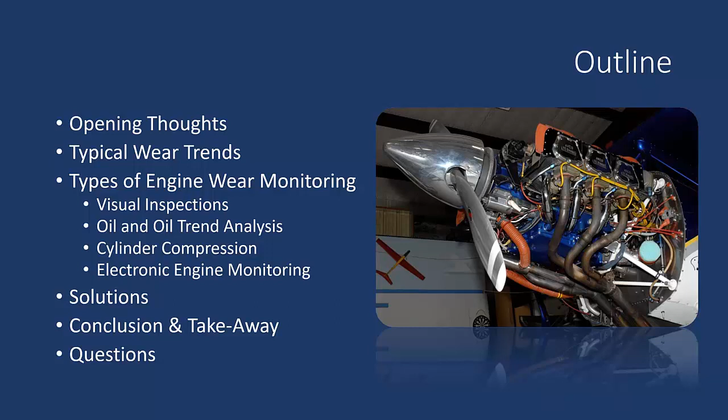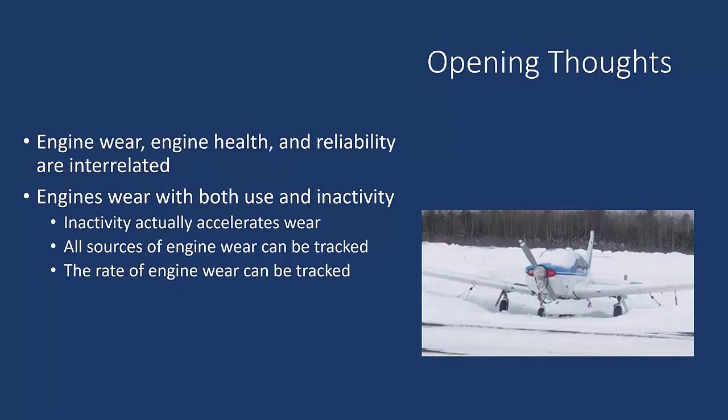Engine wear, engine health, and reliability are all interrelated. Engines do wear with both use and inactivity. Inactivity, or letting the airplane sit, actually accelerates wear. All sources of engine wear can be tracked, and the rate of engine wear can also be tracked using an oil sampling system. Overall engine health is the accumulated knowledge of the available wear indicators.

The average general aviation airplane, unfortunately, is being flown a little bit less than 100 hours per year. Given that there's over 8,700 hours in a regular year, our aircraft really aren't being used very often.

So that causes problems with oil on the engine components. Since they can be corrosive, it causes pitting in steel components and causes corrosion and rust in other areas of the engine.

There's leading engine oils out there for the aircraft that have claims to fame, if you will, that their oil is better because it sticks to the parts. Well, that might be true, but what happens if your oil is contaminated with acids? Another oil is going to flow at 0 degrees Fahrenheit. So how's it going to do at high temperatures, which is where you may be flying most of your summer months? So things to consider.

All right, since we're all running hydrocarbon-based fuels, the combustion process actually produces approximately a gallon of water for every gallon of fuel that's burned through the engine. Now, the vast majority of that water goes right out the tailpipe with the regular exhaust. However, if you have engines with excessive blow-by, and even a normal engine with blow-by, it's a normal process, you will have some level of reactants with the fuel components.

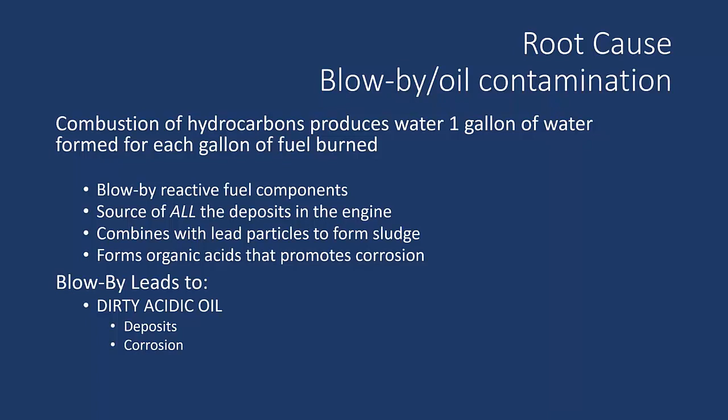All right, so let's go through some typical wear trends. This is going to be a very quick review at this point. Aircraft engines are considered complex components. In order to obtain its useful life, you must do regular periodic inspections and maintenance on the engine.

So when an engine is born, if you will, there's numerous things that can cause failures on the engine. The most common situation is called infant mortality, and that is a combination of potentially a manufacturing defect or human error from the standpoint of improper installation, as an example, or improper engine break-in. That infant mortality period typically runs about 200 hours on your typical general aviation engine.

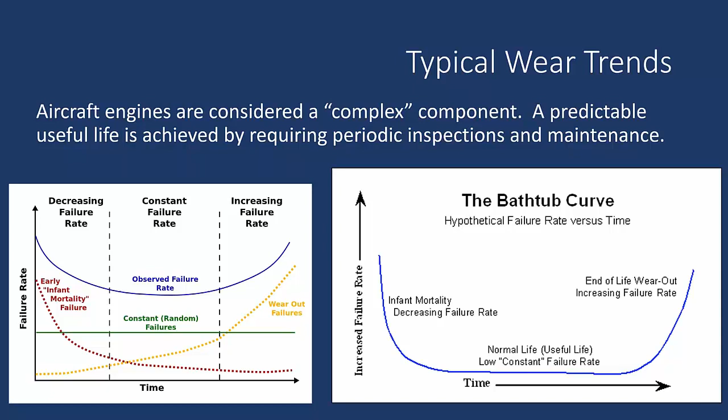All right, so common thought of wear areas in the engine: cylinders. Everyone is expecting some amount of wear within the cylinders. Normal, most cylinders are actually properly treated, have very long service lives, well in excess of half the overall bottom end of the engine life. A lot of your 4-cylinder, 6-cylinder Lycomings, the cylinders will go the entire life of the lower end also. Put that in perspective. All right, piston rings.

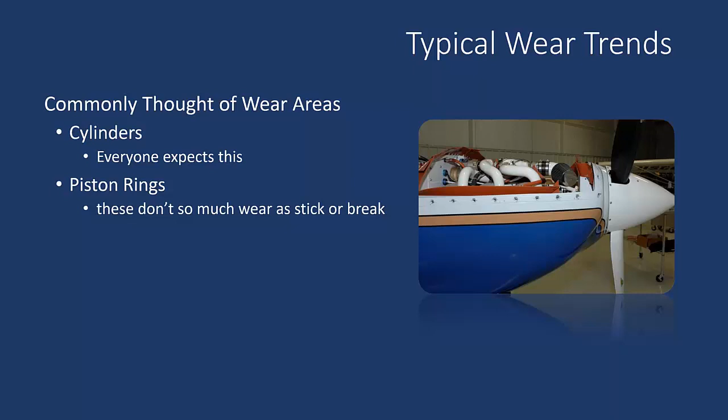The piston rings don't necessarily wear as much as they have a tendency to stick due to deposits, corrosion, and or break. When you have a break in a ring, now you've got to do some little bit of surgery to go get that fixed.

All right, valves and valve guides. Slow and steady wear can be expected on the valves and valve guides. You just need to keep a good eye on the deposits building up on the engine and cylinder, particularly in the exhaust valve area, because deposits form on the guide side. If you run excessively lean or excessively rich mixtures, you can get a deposit on the interface and accelerate your exhaust valve guide wear.

Camshafts and tappets. For most of us, that's the most unpleasant news you're ever going to hear. If you have a camshaft that's corroded beyond limits or worn, the toe of the camshaft gone, you're now into a mandatory engine overhaul situation. You have to split the case. There's no way around it. For some engines, if you have problems with tappets, or if you have roller technology, those can be replaced in service without causing an overhaul.

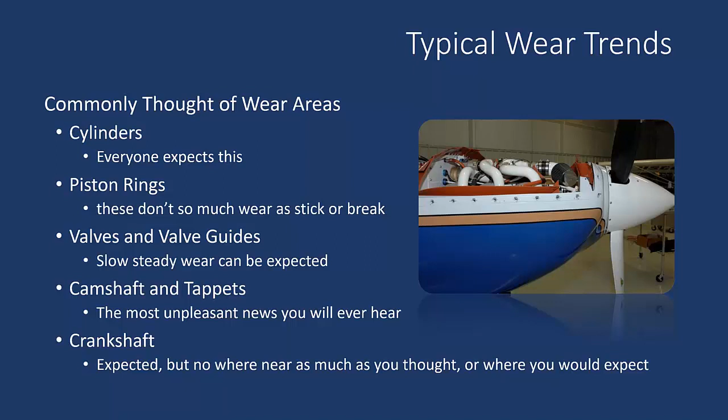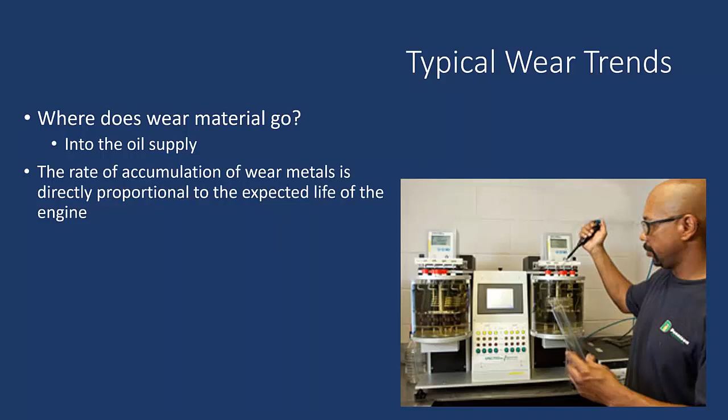So where does all this wear material go? It goes into the oil supply. The rate of accumulation of wear metals is directly proportional to the expected life of the engine. Since these engines and the technology are well known, and the failure modes are well known, we can actually predict when an engine will fail or start to develop major problems based on the amount of wear metals found in the oil.

Many owners and operators do make the necessary commitment in time and finances to conduct oil analysis, but very few actually understand the significance of the data. So it's really important, when doing oil analysis on your engine, to do it consistently, following the instructions provided by the oil sample or analysis company's procedures, so that you get good, consistent data.

An oil analysis program is going to depend on trends. If something just breaks and has big pieces come off of it, oil trends are not going to detect the fault - oil analysis and oil trending will not catch that.

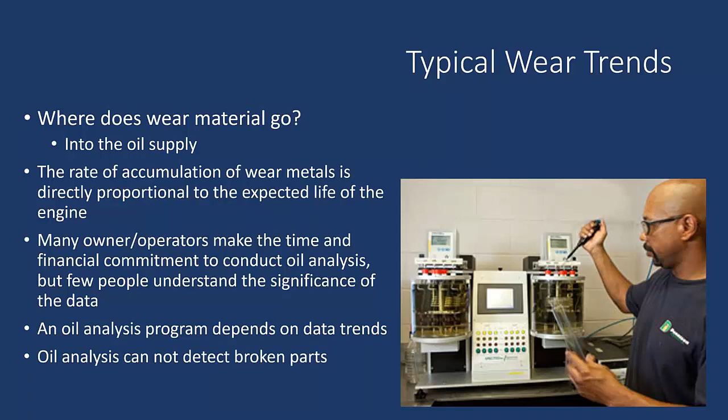The first one is corrosion caused by blow-by. This is a cylinder on the opposite side having blow-by past the rings, and that's carrying a high level of dirty, deposit-ridden material. Unfortunately it blows onto the face of the tappets, and as the camshaft rotates through onto the tappet, it grinds it in and sets up corrosion when the aircraft sits. So you've got to track down and make sure you don't have excessive blow-by going through on a cylinder - that's the side effect.

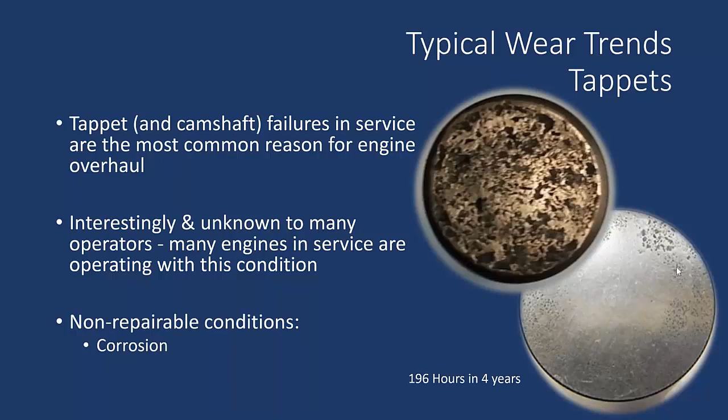Interestingly, and unknown to many operators, many engines in service are operating with this exact condition right now. The non-repairable condition in this situation is the corrosion itself. Engines are corroding out long before they wear out at this point in general aviation.

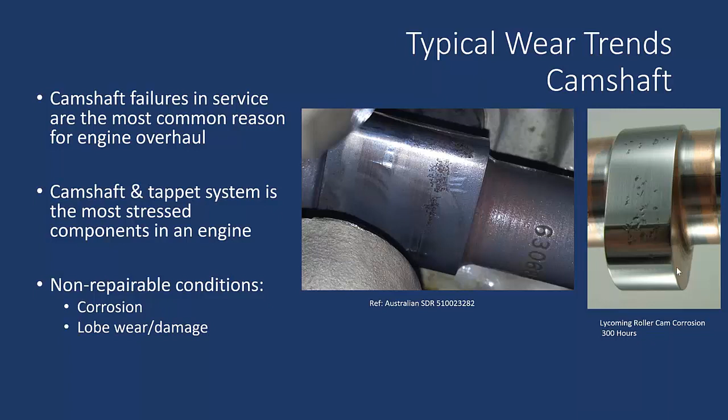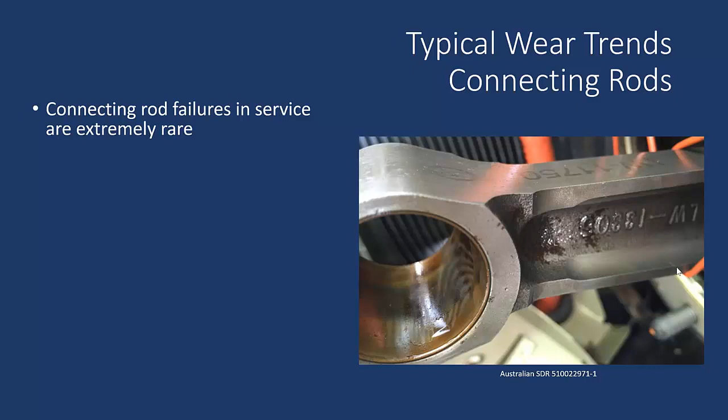All right, connecting rods. Connecting rod failures in service are extremely rare. Rods are simple, robust, and provide a very long service life, and they're very easily refurbished.

Typically non-repairable conditions, very much like what you see in the picture there, is corrosion, very low time installation. You can still see the manufacturer's ink stamps on the components. So in this case, it's corrosion.

What usually also causes a non-repairable condition is shipping damage, improper isolating and letting the two rods bang together in shipping. So that's kind of a problem. Sometimes they will distort due to various operational situations with the engines, and in some cases wear on the big end thrust faces to where they cannot be repaired and maintain the distance that's required between the width of the connecting rod versus the width of the journal.

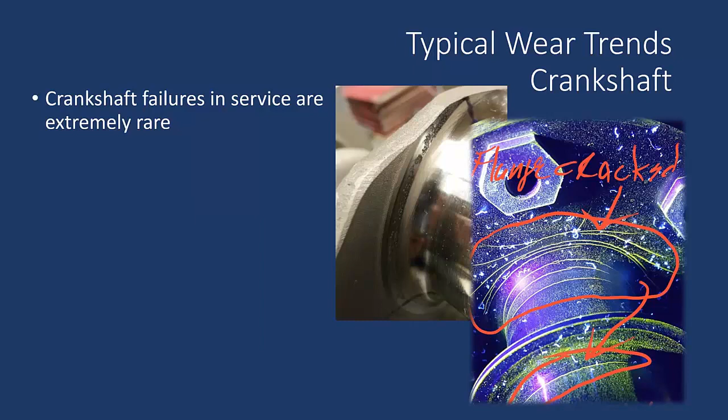Crankshaft failures in service are actually very rare. Aircraft Specialties does routinely refurbish crankshafts through 4 to 5 overhaul intervals, and the typical wear is very low.

The vast majority of crankshafts are not repairable due to corrosion. On the picture on the left, you can see a line of corrosion pits, and this is literally from the engine sitting idle and corrosion being able to get between the connecting rod and the thrust face of the crankshaft. So very unfortunate to lose a $10,000 crankshaft due to corrosive oil, essentially.

On the right-hand side, that's a picture of a crankshaft under Magnaflux, or magnetic particle inspection. And the green lines that you're seeing that are outlined with the red, those are examples of cracks that would be found. The situation that you're seeing here would be typical of a crankshaft that was damaged from a prop strike.

All right. Typically, crankshafts are condemned due to corrosion, pitting, and cracks.

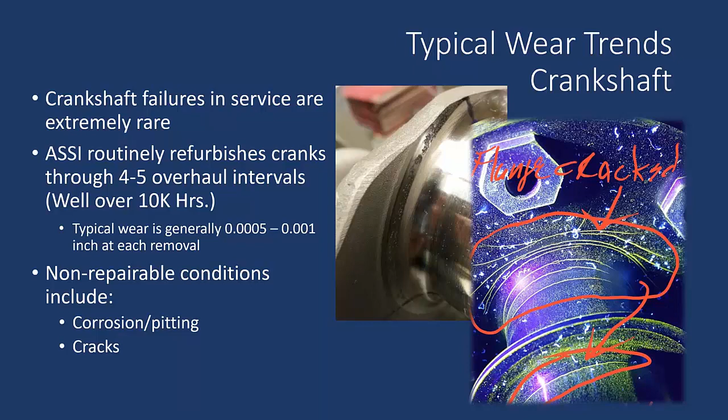The easy fix always is, whenever you can, fly the airplane, fly it with some altitude on it, with a pretty decent power setting for at least an hour, and that will keep a lot of your inactivity, corrosion-based problems within your engine at a very low rate.

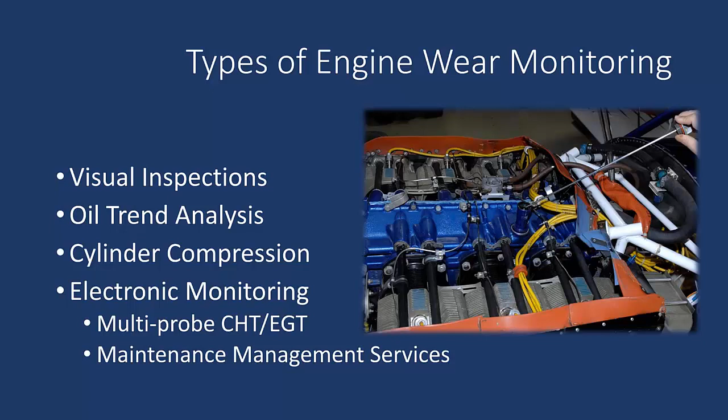Okay, so on the outside of the engine, you want to be doing very well with visual inspections, looking for case condition, cylinder condition, proper baffling and cowling seals. I know that that gets routinely overlooked. If the engine's not properly getting cooling, you're going to have hot spots, and that's a good indicator of where a crack's probably going to start.

In terms of the engine internals, visual inspection, very simple. Start with, when you pull the dipstick and check the oil, look at the color and look and smell the oil and see if it smells burnt. If you pull oil out and it looks nice and clean and new, it's good.

If you pull the dipstick out and there's something that kind of looks like mayonnaise on the dipstick cap, that means probably your oil is not getting up to a high enough temperature to get the water out during operation. That is very typical on aircraft that are operated lean of peak at relatively high altitudes for long periods of time. The engine literally cools off and the oil doesn't stay hot enough to get rid of the moisture and the acids that can then develop into the oil.

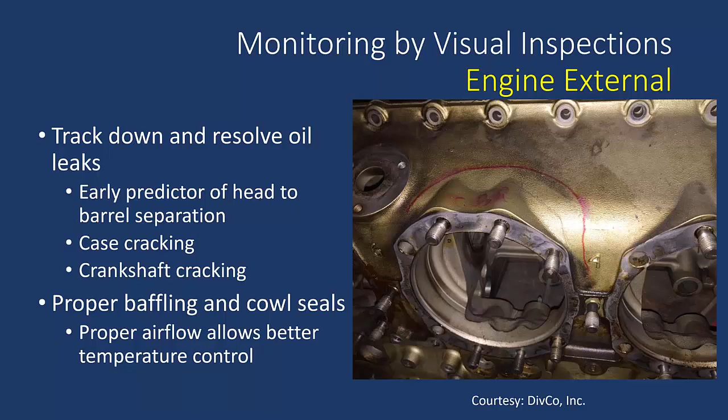Sometimes an oil leak can be an indication of a start of a crankshaft crack if you're dealing with a constant speed propeller installation that uses engine oil. All right, again, proper baffling and cowl seals. Proper airflow is much better for temperature control.

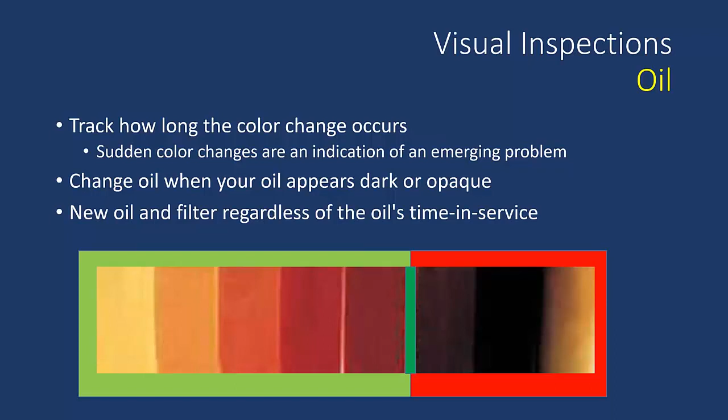Whenever you change the oil, make sure that you put new oil and filter in regardless of the oil's time in service. Big thing with the spin-on oil filters, 50 hours doesn't necessarily mean 50 hours. In a lot of cases, the spin-on oil filters, just in normal operations, will actually start to bypass internally. They're designed to do that. And when the oil gets to a point, it will bypass automatically, and in a lot of cases that's around that same 25-hour mark. So just kind of a note to self.

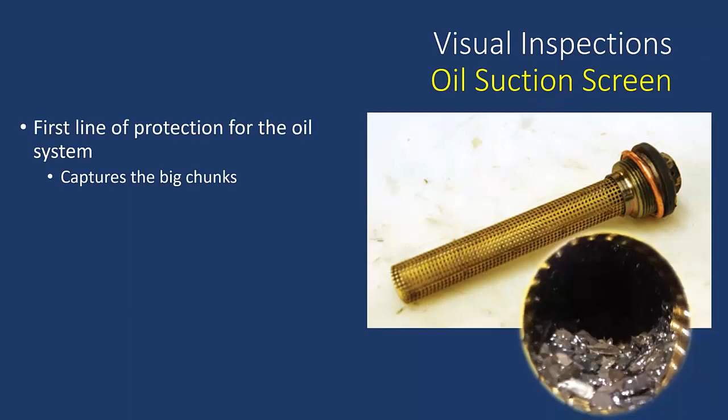All right, oil suction screens. It's your first line of protection with the oil system, and it's going to capture the big pieces. No necessarily trend information there other than that there's something wrong. So make sure that that is inspected whenever you can. It's recommended in oil changes by Lycoming. Continentals have a very similar setup. Unfortunately, with how the airframe installation is, it's typically very hard, if not impossible, to get to in most Continental installations.

Engine oil pressure screen. This is what you're going to have in lieu of a spin-on oil filter. This is going to be your 25-hour oil change interval. What you see there in the picture is a whole bunch of what looks like nice little shiny glitter. That unfortunately is a camshaft that has come apart. So don't be afraid necessarily with a little bit of metal in a suction screen like this or in the oil filter media. The manufacturers have a fairly broad tolerance for the amount of metal that can be found and still continue in service. It's always a very uncomfortable feeling when you see that amount of metal, but it's just something where you find that type of a situation, it's time to investigate.

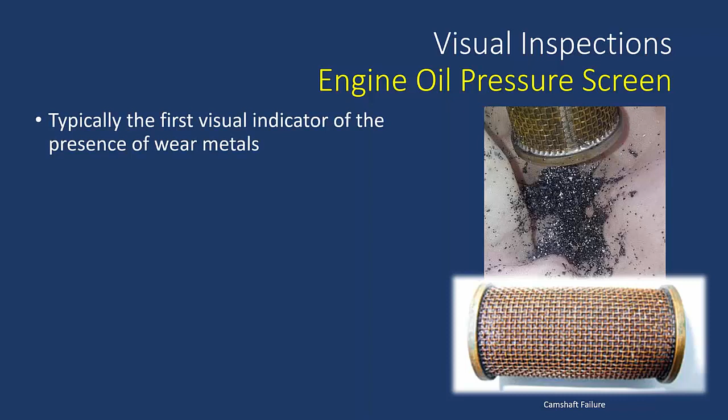And never throw away the data. It's very hard to troubleshoot if this gets contaminated with other debris from the shop or whatever. So make sure you do a clean environment when you're cleaning these screens, and make sure that you save the data.

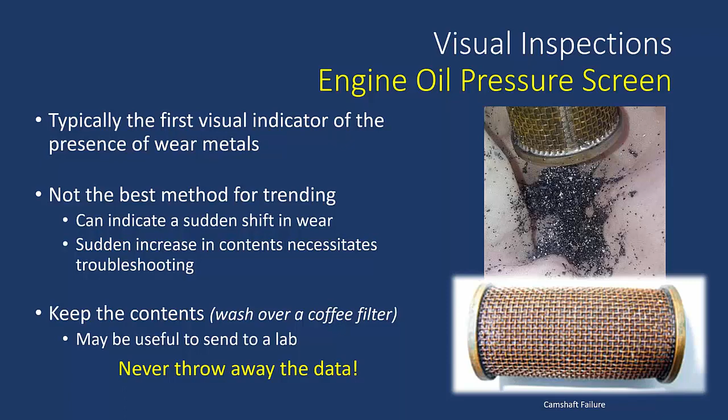All right, visual inspection of the oil filter medium. Very easy way to establish trends. Engine oil is typically changed at a fairly consistent interval on the airplane or the engine, and as long as you're doing consistent oil changes and consistent data gathering with the filter media, it's a very good trend tool. Very low cost, too, since you've already bought the oil filter.

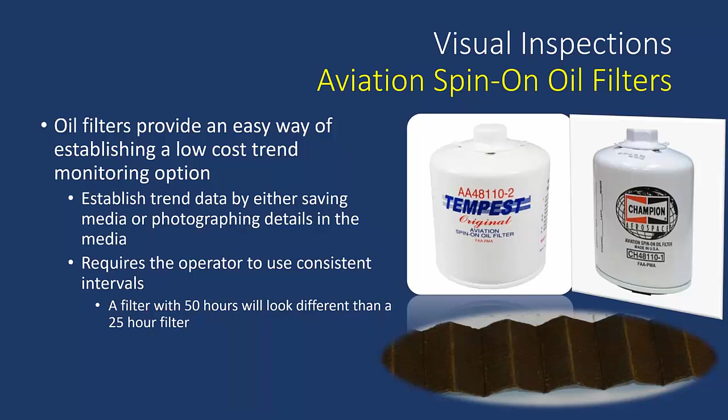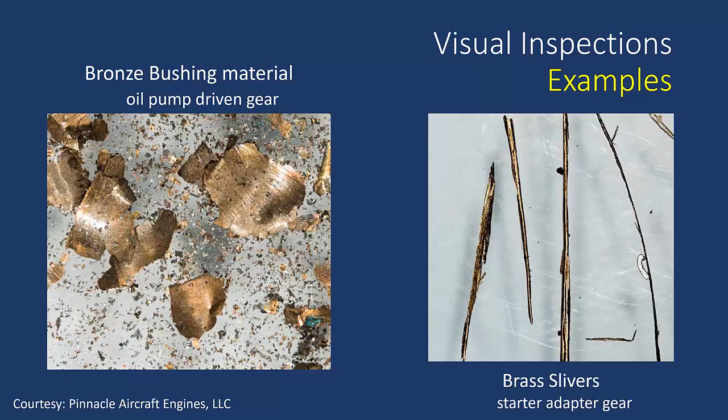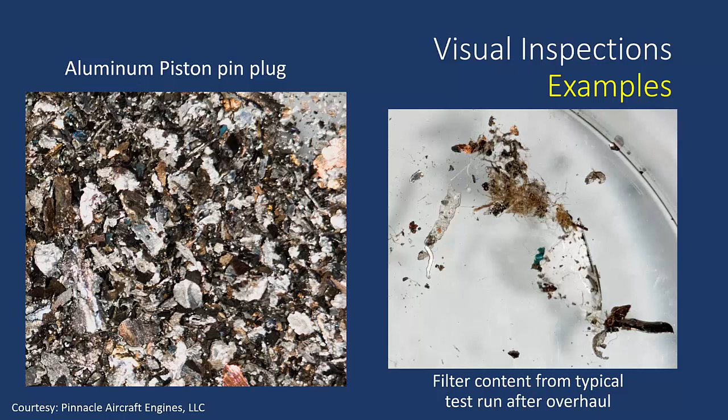On the right-hand side, a whole bunch of what looks to be trash, because it is. This is what it will look like after an engine overhaul. On the first engine run, when you cut the filter open, there will always be some level of debris, FOD, foreign object debris, in the engine. Cleanliness is extremely important when maintaining these engines and having them opened up, but this is a typical example. Some of the stuff there is Scotch-Brite cleaning pad material, some silicone sealant type material, a couple corners from gaskets that flaked off during assembly when it ran. So that's fairly typical.

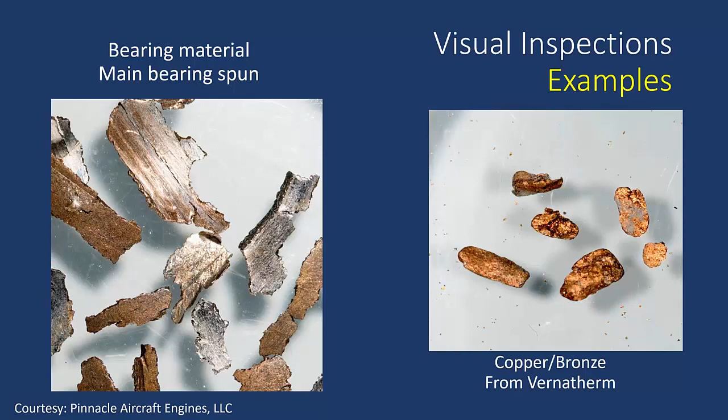Some more pictures there of bearing material.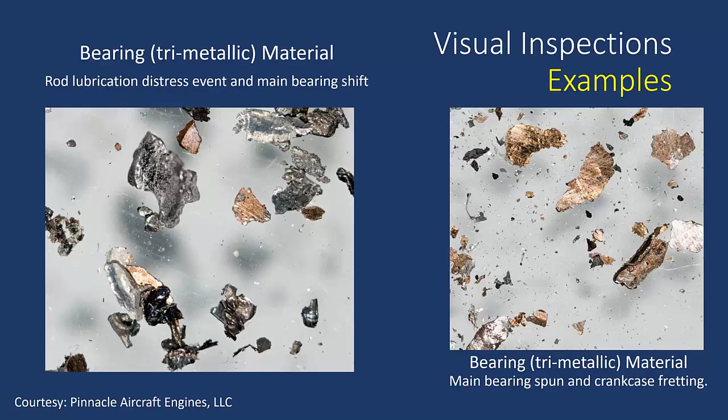All right, let's look at borescopes. So another visual inspection means is going to be borescoping the inside of the engine, or the cylinders in particular. Borescopes are more readily available than they ever have been, so they work out very well.

Easy to operate. If you have one of these or considering getting one, they're well worth it.

A couple of cautionary points with getting a borescope and borescoping your cylinder for the first time: it's going to look scary to you. So get with some folks that have done this before, and the key is to go in and start getting trend data. Obviously you can find a crack early on, but the big picture with borescoping is to understand what the baseline looks like and then take subsequent borescopes and pictures of the items in the cylinders for comparison.

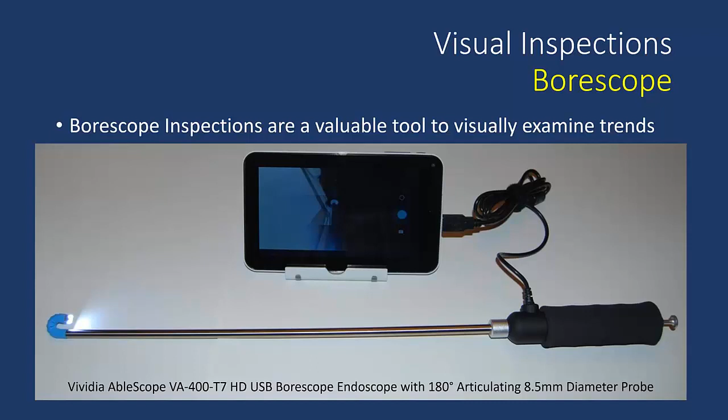See what you're looking at in terms of color changes, erosion, corrosion, etc. All right, so here's some wonderful pictures. Borescopes, just like oil changes, need to be done at regular intervals.

It's really important to get some experience looking at the borescope and looking at the particular engine to know what normal is going to look like for that engine. That's why it's important to look whenever the engine is already open, let's say for a spark plug service. You don't necessarily have to go in specifically for the borescope - just line it up with regular scheduled maintenance where you're already gaining access to that cylinder.

Not a good day. Always compare whatever video or pictures you've taken so that you can see what the level of deterioration is and what its progression rate is.

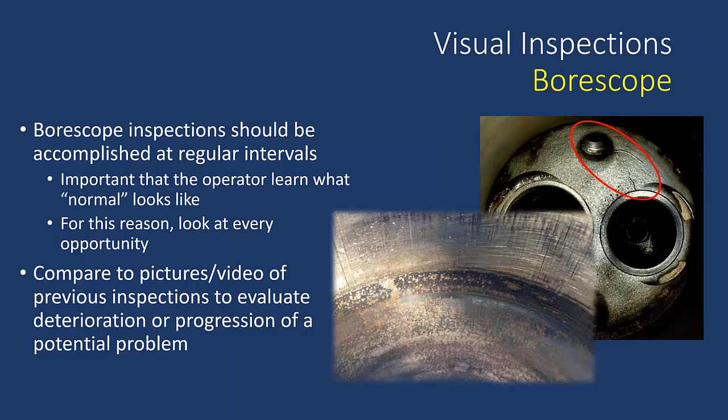Burnt exhaust valves have long been a leading cause of cylinder failures and power loss in piston engines. Valves that fail to seat properly are subject to severe and uneven heating, and based off of color indications, it can be determined that they are in imminent failure mode.

These three exhaust valves here are excellent examples of perfectly good exhaust valves. What you're looking for when you're looking at exhaust valves is going to be the nice symmetrical round pattern, and the red to orange color is perfectly fine.

The saying goes that burnt pizzas are okay. If you see the picture on the far right, that's an example of a properly patterned exhaust valve. The additional deposits on it are due to running the engine richer than it needs to be, or that cylinder running richer than it needs to be. So that's kind of the extreme case. What you're really looking for is pretty much in the middle - that's typically what you're going to see.

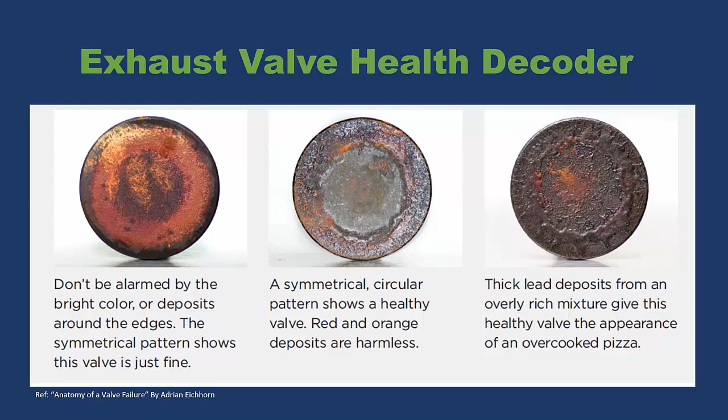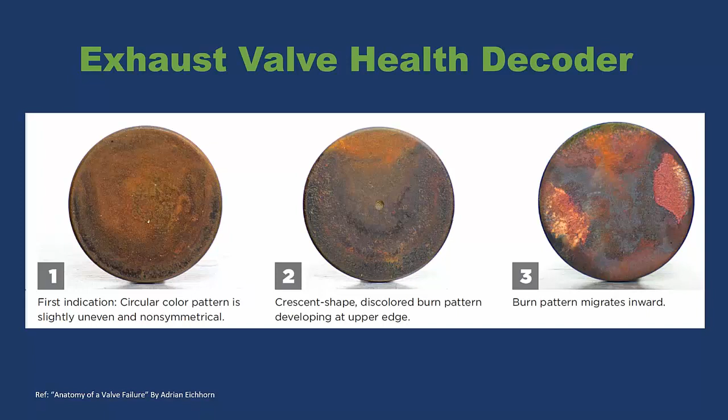It's uneven. And as that goes along, if you look at the 12 o'clock position on the valve, you can see that it's progressively getting more of a burn pattern, and it's not symmetrical. So you've got this little arc going on here. In the third picture, you're seeing that the burn pattern is continuing to migrate inward and starting to get ugly.

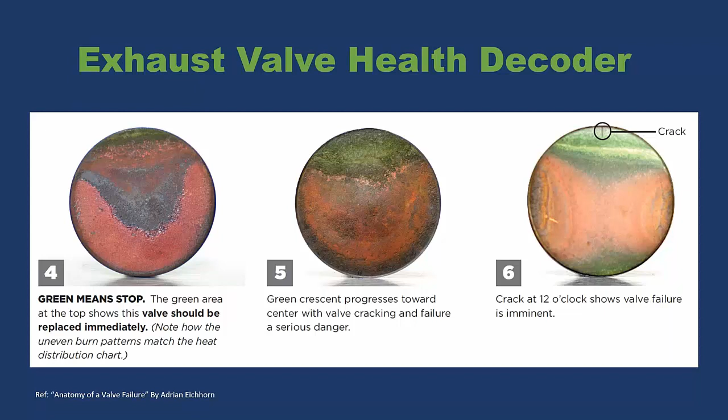There are many trends that can be established with both external and internal indicators. The key with this, just like everything else, is consistency. Make sure that you get consistent data - you're looking at your oil changes consistently, you're looking at borescopes consistently. Oil trend analysis needs to be done consistently with those oil changes so that you get a good overall picture.

Save the data, take pictures, bag and tag the stuff, put it on the shelf, because nobody remembers what it looked like 6 months ago. Trust me. Monitor oil for sudden changes in color or smell - that is a very easy, inexpensive way to get an indicator of cylinder health.

So what we're really finding out in the industry is, with the amount of corrosion and the lack of use of most general aviation aircraft sitting on the ground, we've got to be much more aggressive with arresting the amount of corrosion happening inside these engines.

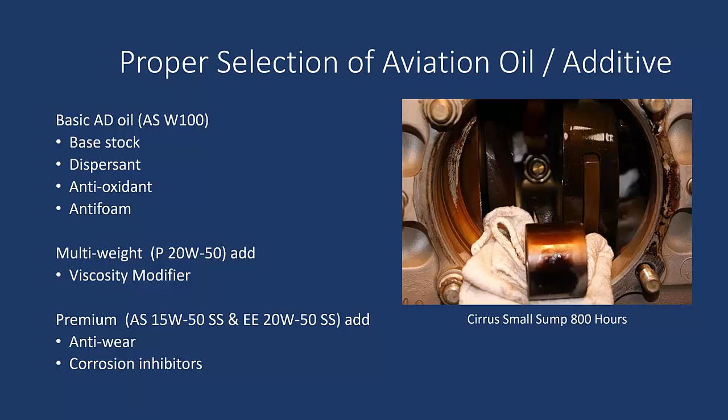So this is not what you really want to see when you have to take an engine down or take a cylinder off.

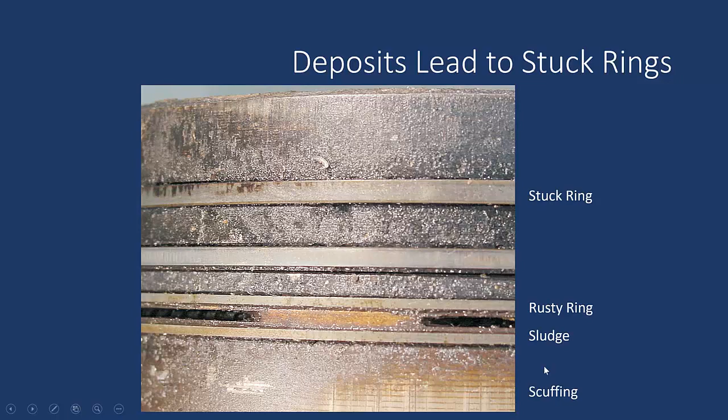All right, because of the corrosion situations going on within the engine, and particularly within the cylinders, this is an easy way to get some pictures. On the right-hand side is a Continental IO 520 with 720 hours on it. It suffered from stuck rings, rust on the cylinder walls themselves, and it got a polished pattern, so it lost its honing marks. On the left-hand side would be what the new steel cylinder bore would look like, same cylinder.

So you're seeing what it should look like new versus what 720 hours looks like. That is an extreme case of the amount of wear. There should be a lot more of the cylinder honing marks visible. You can basically see probably about 5% of them in that picture. Just kind of put it in perspective.

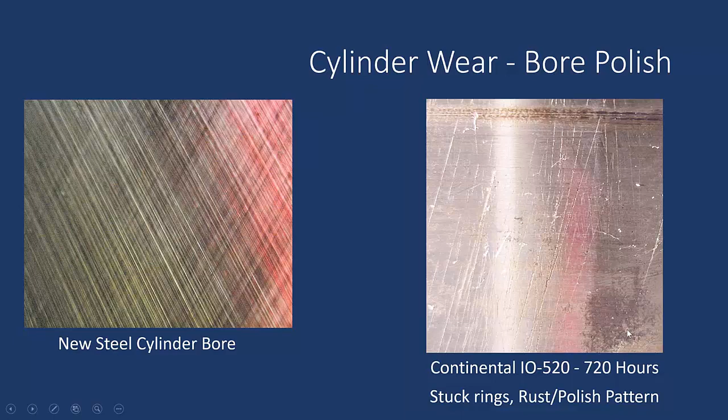All right, so here's some pictures that we're able to obtain during the CamGuard certification process. These are the actual photos that were taken to provide substantiation to the FAA.

All right, so these pictures, this was an aerobatic aircraft that was flown during airshow routines. It's an IO 540 with 300 horsepower, 531.5 hours through the testing program. These are undoctored. These are just the straight data pictures that were taken.

The oil on the parts was 54 hours in service after it had sat after the airshow season for 4 months. All right, so the engine monitor showed routine oil temperatures at 300 degrees Fahrenheit and cylinder head temperatures in excess of 450.

All right, so on the left is an engine that has had the CamGuard in it, properly dosed per the instructions for the 530 hours. Picture on the right is the piston from the control, which ran standard W100.

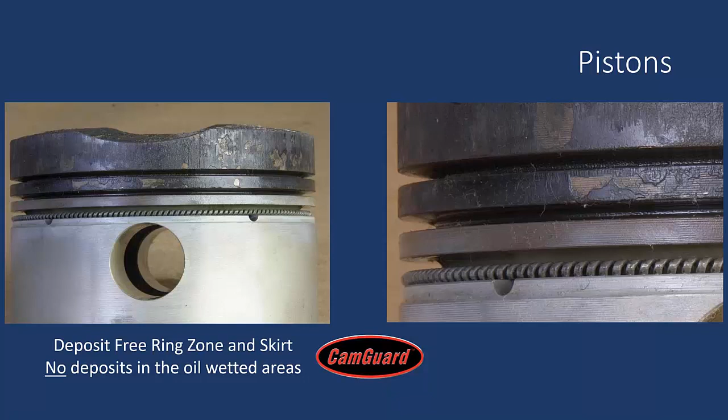All right, if you remember back to the picture of the Cirrus small sump Continental, and what the level of deposits and varnishing that occurred on the parts. Compared to this picture, you can see that there is essentially no deposits. Wherever the oil and oil additive combination can reach in service, there is no deposits.

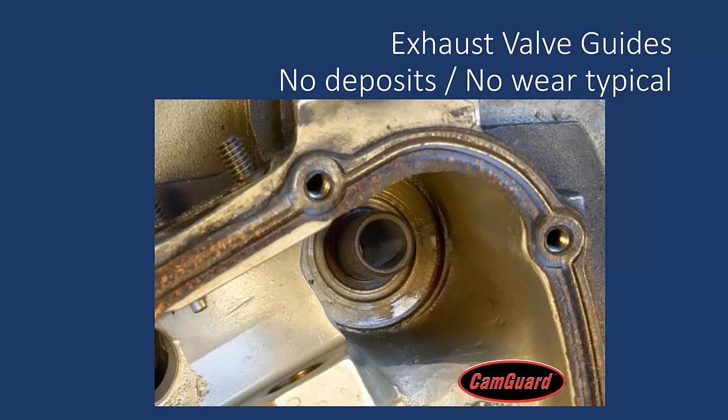Here's a picture of an exhaust valve guide, and when measured, it still met new specification with 500 hours.

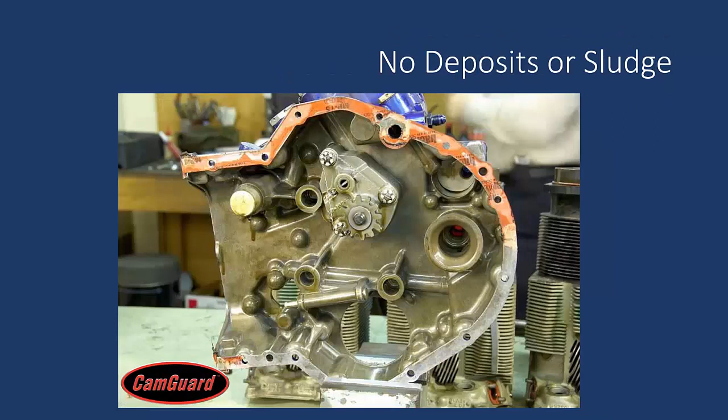Okay, accessory box, accessory case picture. You can see what the level of deposits are, and notice how the oil is still clinging or attaching itself to the metal after disassembly.

Pistons, pins, pushed out with your finger. That's not typical of a 500-hour engine.

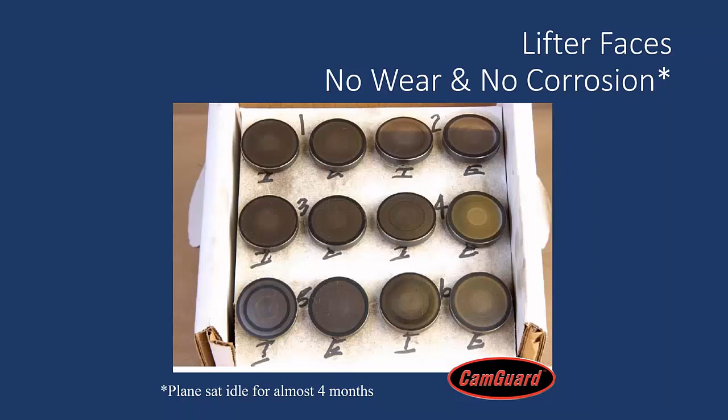These are the lifters that came out of the engine. Notice that there's a uniform circular pattern all the way around, and as part of the test, the aircraft sat stagnant for about 4 months from the end of air show season before the engine was pulled for evaluation.

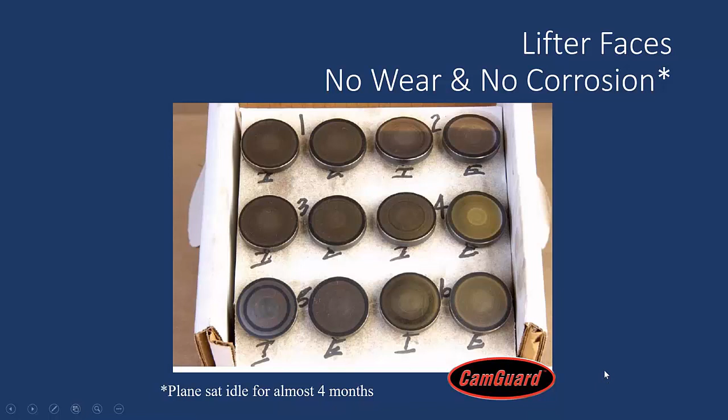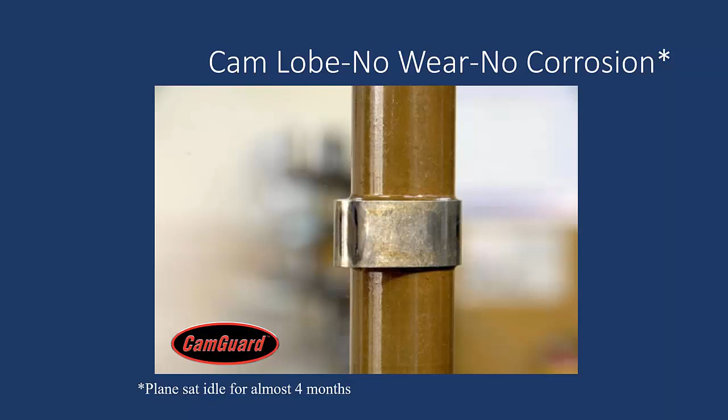All right, camshaft lobe. This is a Lycoming. Keep in mind it had an inverted oil system on it, so at every engine start it had no effective oil pressure for the first 20 seconds, and during the air show routines, routinely flew for a cumulative time of 1.5 minutes with 0 oil pressure to the cam. What you see in the picture is slightly polished, which is considered normal in service and is by no means abnormal.

All right, here's a piston that came out of a TSIO 520 at 835 hours, and you can see that, again, proper use of oil changes and corrosion inhibitors will definitely protect the engine.

All right, so let's take a look at what's in the oil real quick.

Actually, do we have any questions out there, Lane? We have one that kind of goes back a little bit. One person wanted to know, would you please describe exactly what you mean by blow-by?

Okay. Blow-by is when the engine is on the power stroke and the spark plug fires and it ignites the fuel-air mixture within the cylinder. Of course, the expansion of the gases is going to push that piston down on the power stroke.

There's a set of rings on the piston that provide the seal between the piston and the wall of the cylinder. If for some reason those set of rings cannot make good contact because they're corroded or they're stuck or they've broken for whatever reason, then you're going to have high pressure combustion gases blow by that seal or those rings, and that's going to blow into the crankcase of the engine.

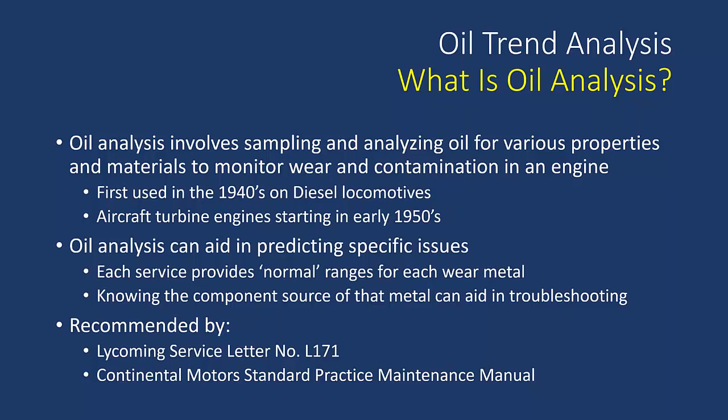Excuse me. All right, so

Spectrographic oil analysis identifies concentration in parts per million of the wear material in the oil sample collected during an oil change. Quick tip: when you do your oil change, make sure the oil is warm. As you drain the oil out, let about the first quart drain by, then put the little sample cup into the stream to collect a clean oil sample so it's not contaminated by any junk that might have been around the drain valve or on a hose you're using as you started draining the oil.

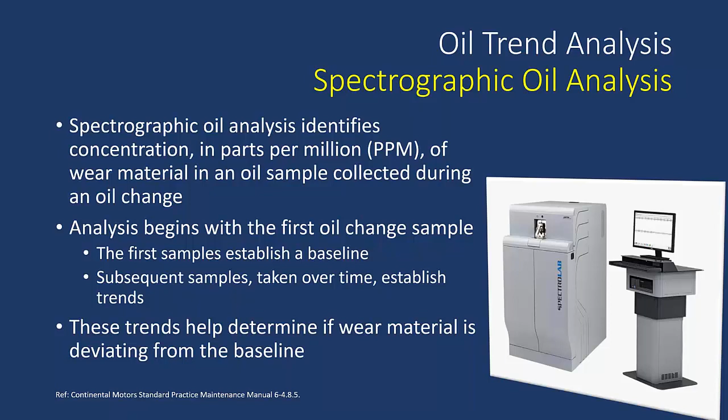Analysis is going to begin with the first oil change sample. The first sample establishes a baseline, and your subsequent samples taken over time will establish the trend. Again, just like borescoping, consistency is key, because you want to make sure the oil has about the same amount of run time on it so you can get an apples-to-apples comparison.

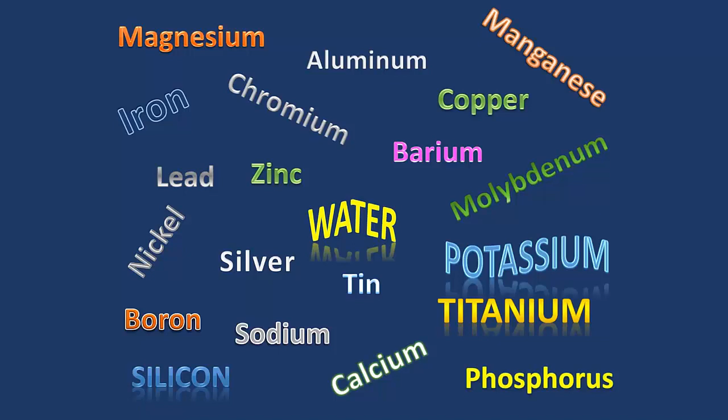So what's all the stuff that's going to come in on that oil analysis report? Well, that depends on what you've got, so very quickly we'll go through that. So what's in the oil?

Aluminum—most of the engine's actually made out of aluminum. A typical source of aluminum in the oil is from piston skirts, piston pin plugs, or a fretting crankcase half. Through-bolt torque on cases is extremely important—it's important that they be properly inspected and checked at regular intervals, and it is imperative that proper procedures are followed during cylinder changes to maintain that torque value on the case halves and to keep the torque value on your bearings on your crankshaft.

Chromium—chrome, if you will—chrome-plated pistons, piston rings, cylinder barrels if they're chrome-plated, and exhaust valves. So if you've got regular steel cylinders, you're looking at an exhaust valve.

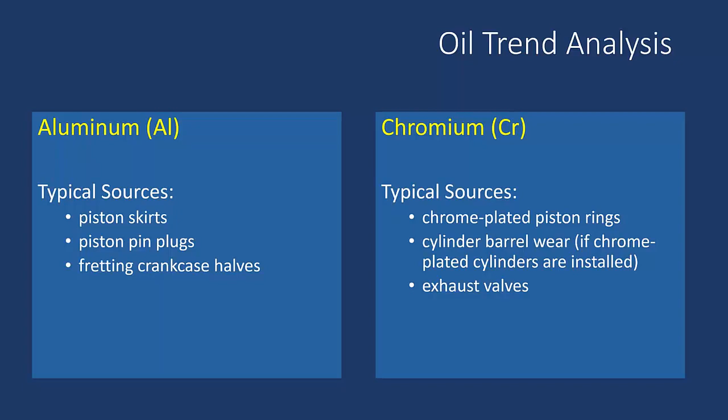Iron, the principal wear element, comes from steel cylinders, lifter faces, cam lobes, gears, crankshaft, and camshaft journals. Depending on the levels in oil analysis, it can lead you to a finding in the filter, and based on what you find in the filter, it can probably be analyzed to determine which one of these items it's coming from.

Copper—bronze bearing shells. Don't worry too much; sometimes you get lucky and it's only a deteriorating oil cooler. But if you see a spiking amount of copper, make sure you check that oil cooler, because an oil cooler failure in flight pretty much equals an engine failure in a few minutes. So something to keep in mind there.

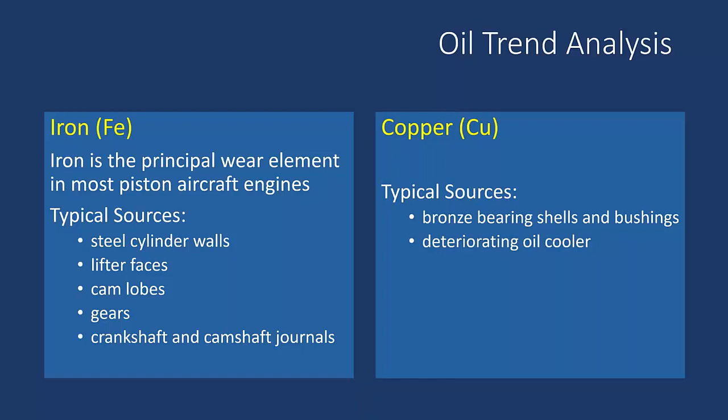Also, I've run into this a couple times now, and it's been confirmed at the manufacturing level: if an operator changes to Aeroshell 15W50, the additive package in that oil will work on the copper flashing that's on the camshaft. That copper flashing is there as part of the manufacturing process for the hardening of the cam lobes—it has nothing to do with the strength of the material. It's sacrificial in nature, but if you just changed over to 15W50, it may show up as a spike in copper, so just an FYI on that.

All right, lead. Lead's going to come primarily from aviation fuel. If you're not running 100 low lead, well, it's coming from bearings. That's all I can say about that. The picture there is actually the front nose of a fixed pitch propeller Lycoming, and the stuff that looks like putty in there is actually lead deposits from fuel. Keep in mind that's completely inside the oil system. That's how it gets up there. The oil gets trapped up in there and leaves the deposit.

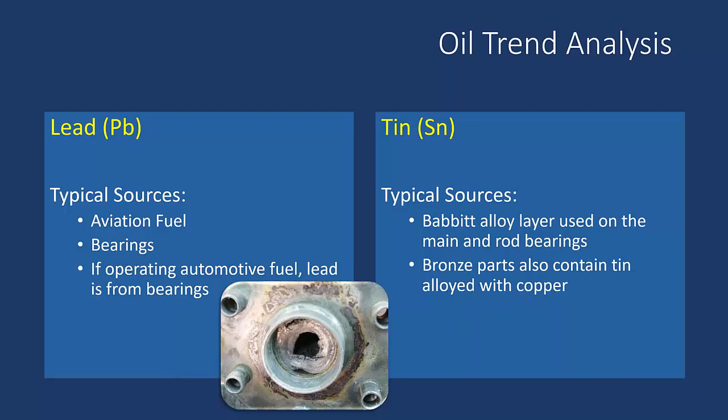All right, tin. Tin is the outer layer, tin flashing on some bearings, depending on which engine and what model you've got. Sometimes bronze parts are going to have a tin component to it.

All right, nickel. Typical sources of nickel, again, are going to be your exhaust valve guides. And if you've got nickel-based cylinder coatings, that's going to show up there.

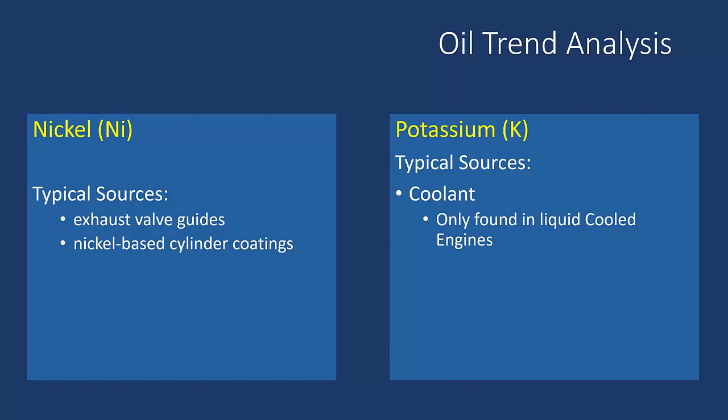Potassium, that's going to be coolant-based if you've got a liquid-cooled engine. Manganese, typical source of that's going to be greases.

Silver, very rare. If you're running a radial engine, you might find silver on your report, or if you've got a really, like a classic Continental E185, the bearings that were in that had silver flashing on them.

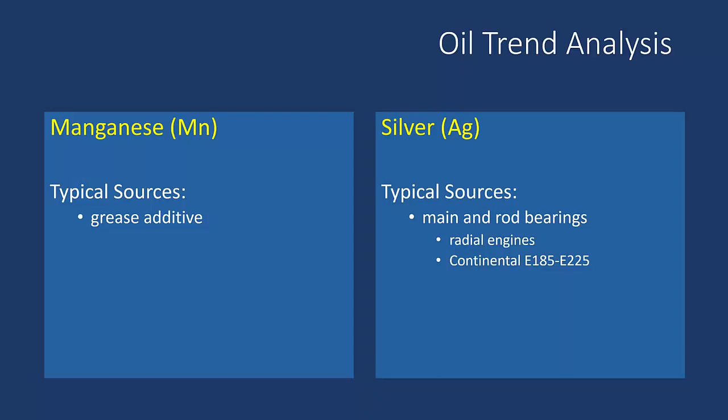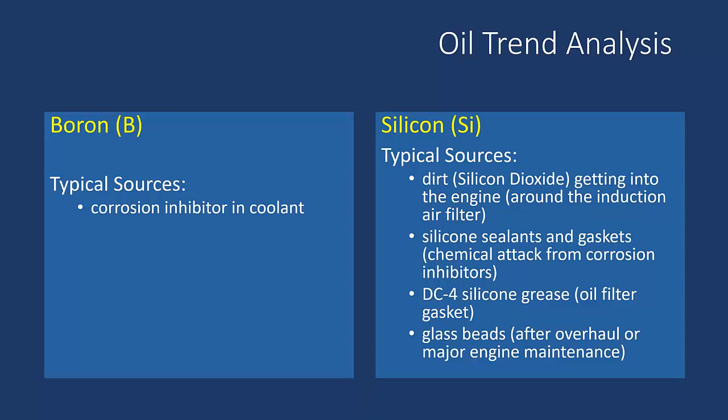Silicon is basically dirt. If you get a high count of silicon on your oil analysis, it's time to go look around your air filter and make sure that that intake box is nice and sealed up. If that's not the situation, maybe an additional dab of DC4 got put on the oil filter gasket if you use that type of setup, and that can set it up for extra silicon. If you had pretty much fresh out of overhaul type situation or heavy maintenance, there may be some glass beads from bead blasting operations, cleaning operations on an engine component, and maybe not all the beads got out of an oil passage or something along those lines, so it may elevate your silicon level.

All right, phosphorus. Phosphorus you may find on a report based off of what oil you're running, because phosphorus is used as one of the anti-wear protections. You're going to find that if you're running Exxon Elite 20W50, Aeroshell 15W50, or any of the plus versions of the Aeroshell products.

All right, and then items that are typically found in an automotive oil. So if you find any of these in your aircraft engine, it's sometimes an indicator that you need to watch your oil, what's getting put in.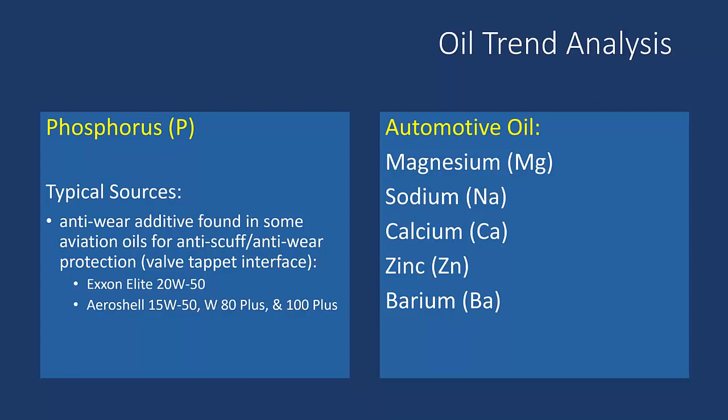All right, conclusions. Proper selection of oil and oil additives, based on the aircraft operating conditions, is going to be essential. Whenever you can, do what you can to make sure that you're reducing deposits. If you're reducing deposit buildup in the engine, you're inherently decreasing the amount of corrosion. And if you're decreasing the corrosion, you are definitely increasing the overall service life of the engine. Unfortunately, in general aviation, we're losing more engines due to corrosion than wearing them out due to operation. When you can, fly your airplane.

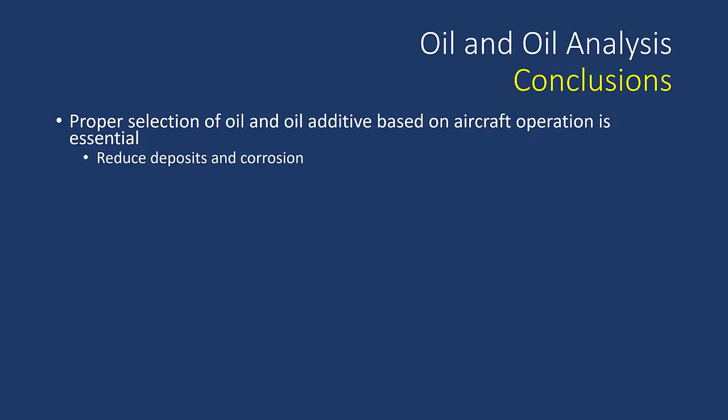Oil analysis is definitely the best trend indicator for engine health. It also aids in troubleshooting of faulty components. Don't be alarmed necessarily when you get an oil analysis report and it has a high level of a material. That material may be coming from a component that is external to the engine or is easily accessible, which does not require disassembly of the bottom end or an overhaul. In many cases, simple fixes to an individual cylinder or to like the vernatherm can arrest the problem. Just remember that all wear metals are going to end up in the oil. The rate of engine wear determines the useful life of the engine.

Make sure you're conducting oil analysis at consistent intervals. You need to have at least 10 hours on the oil to get good data through the oil analysis. And you need to make sure that you record and replenish the oil amounts and the times. That helps the lab get a good calibration number for the wear amounts. Also, very important to make sure that you select one lab to conduct all the oil analysis. You can't really mix and match reports from different labs. It's really important to make sure that you have a consistent set of oil analysis reports from the same lab so that you have that true apples to apples comparison.

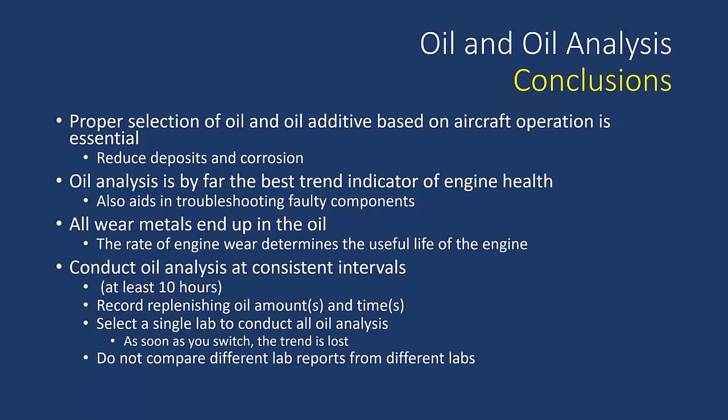All right, cylinder compressions. Let's go through this. Differential pressure checks, sometimes known as a leak down test, are one of the quickest and easiest ways to determine top end health of a piston engine.

You got to be cautious with this. It's just a snapshot in time, so be careful with it. There is theoretically some trend information in the logbook, but you need to be really careful how you use it. It's really important that you're looking for consistency with cylinder compressions as opposed to an arbitrary number like 64 or 80.

You really are looking for all the cylinders within 5 psi of each other, and if you have more than a 10 psi split between any of the cylinders, you need to investigate and find out what's going on. It may be something as simple as a little deposit or debris preventing the valve from fully closing, or a little bit of stuff going on with a ring that just needs to run again, and it'll clear itself out.

Air leaking past the rings is not an immediate cause for concern. Rings do accumulate deposits in normal operation. If you're using an oil additive, it's definitely going to greatly reduce the deposits, because the relative motion of the rings while the engine is running will actually knock off any deposits that start to build up, and it keeps itself cleaned out.

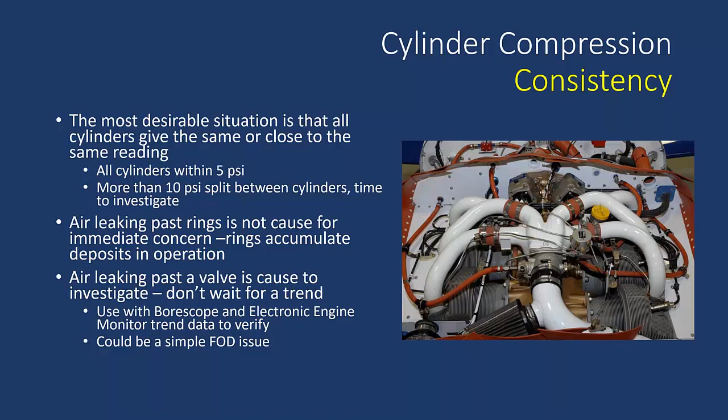If you've got an electronic engine monitor, you want to be looking at that data. Don't panic initially, you just got to go in and get some more data. More times than not, it's just a simple piece of FOD, a little piece of debris preventing the valve from fully seating. For those of you more maintenance oriented, we're seeing a lot of cases of big bore Continentals running lean of peak. Keep an eye out, sometimes the deposits are now showing up on the intake valves.

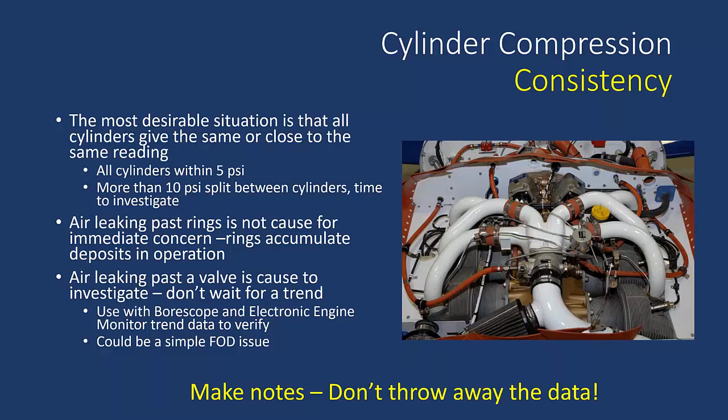Again, make sure you're keeping the data. So again, differential compression checks can be used to establish trends, but you got to be a little careful with them. Just remember, it's a snapshot in time. Consistency between the cylinders is much more relevant than just an arbitrary number.

Lycoming and Continental have different philosophies when it comes to differential pressure compression checks. We're really finding as time goes on that it's a snapshot picture, not truly an overall trend piece of information. So just look for that consistency, that's really the key with compressions.

It is okay to consider cylinders as a line replaceable unit. Don't think you've got to do a complete top if you've got a problem with one cylinder. One poor performing cylinder, don't throw the baby out with the bathwater. Do proper troubleshooting, determine which cylinder it is, and then if you do need to change out that cylinder, do them one at a time. If you're doing multiple cylinder changes, be very careful to maintain the proper torques on the through bolts and cylinders.

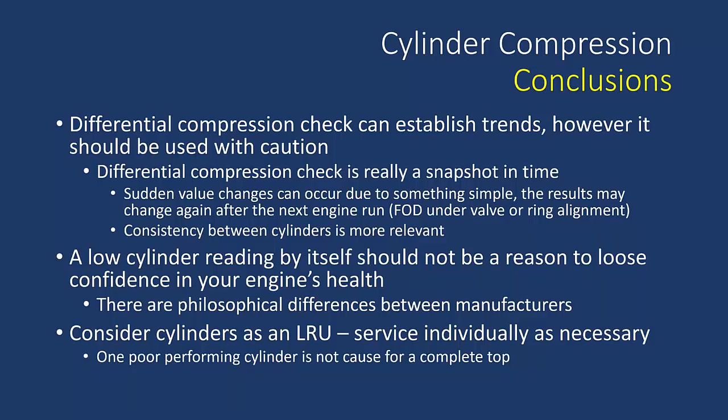Engine monitors. Most all electronic monitors record the data and it's accessible for trend analysis. It's very nice to have, but they're getting less expensive, relatively speaking, and a lot of airplanes still don't have them. But if you can get into a situation with an electronic engine monitor, it's a very good trend tool. Combine that with oil analysis and the ability to pull up the data, and it's a very effective means of determining the long-term health of your engine, and a very good way to determine in flight if you've got an immediate problem.

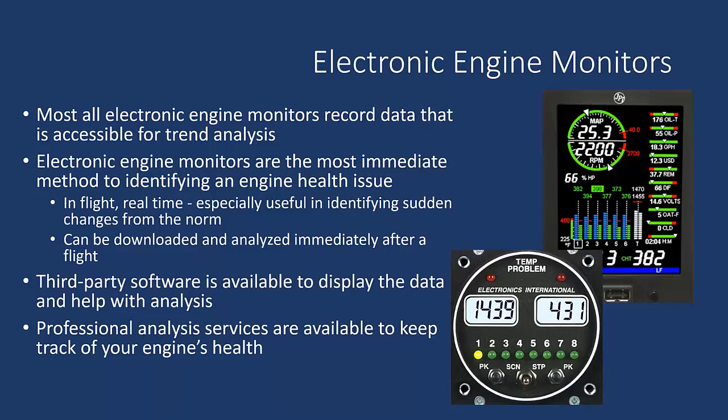There is third-party software available, and there are also professional analytic services available to keep track of your engine's health. It's all a matter of what you're comfortable with. Do you want to get the data and process it? How much data are you comfortable with? And do you want a second pair of eyes checking over the engine health? It's all a matter of what level of data and analysis you are comfortable with.

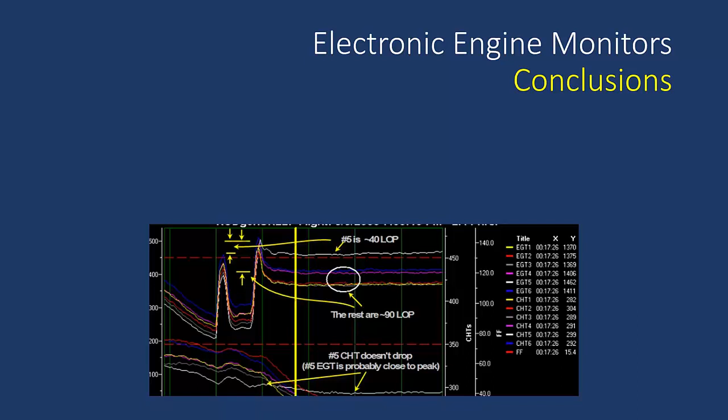You can even overlay this information with ADS-B information now. So watch out there, pilots.

Electronic engine analyzers - just remember that the phrase we use is it's another tool in the toolbox. It's another tool that you've got in the panel. The other thing is, remember to be a pilot also. Keep flying the airplane and don't look at all the bells and whistles sometimes.

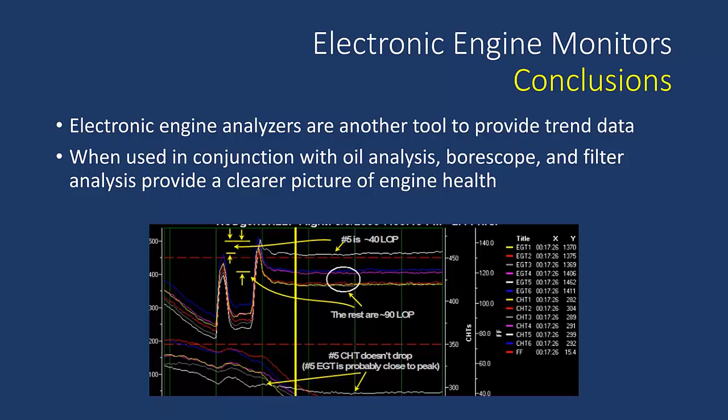Overall, engine monitors used in conjunction with oil analysis, borescope, and visual inspections can give you a very clear picture of engine health, and combined can give you a very good and accurate indicator of the useful life of the engine.

So how do we know our engine's healthy, or what the engine longevity is going to be? The trends are a good predictor of overall engine health. There are multiple sets of data sources available to establish the trends. The level of confidence in determining the engine's health is directly proportional to the amount of effort you want to put into it.

Consistency of the data is key. You can't do just one piece of it and do an oil analysis once a year or every other oil change and really expect to get your money's worth out of it. So just remember that engine reliability is simply being aware and acting on emerging trends, or sudden changes in any particular parameter.

Oil consumption - the amount of oil that it's using or not using can sometimes be an issue. Remember, the engine's going to be airworthy as long as it makes full rated power. The duration that it takes for the oil to turn black is an indicator of an impending problem.

New or worsening oil leaks are definitely something you want to get on top of. I've seen multiple situations where cylinders were cracked through more than 3/4 of the circumference of the cylinder, and it wasn't detectable early on because of where the cracks originated, and they only leaked oil when it ran. When it shut down, there was no way to find it. So we figured it out over a long period of time, but it's a sickening feeling to find a crack that's 6 or 7 inches long in a cylinder. So you want to find them early.

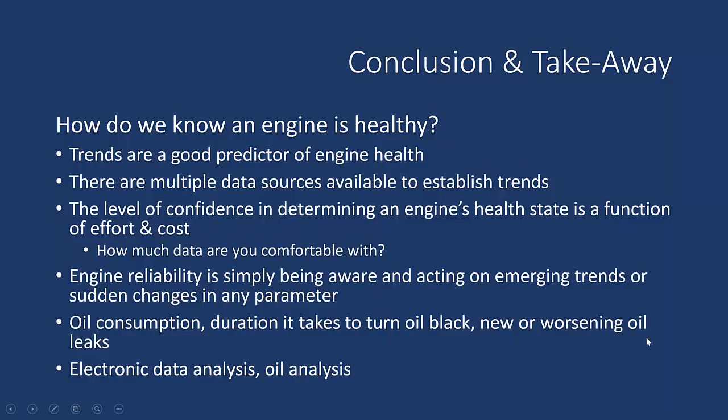Make sure that if you can, electronic data is good, but data can sometimes be overwhelming. You combine an electronic data analysis with an oil analysis program and you're in pretty good shape.

So, conclusions - trending can be a simple collection of the stuff that you're already doing with oil changes. That's an easy way to start. Remember that corrosion is getting these engines far earlier than they should be. They're just not wearing out anymore. Corrosion is taking out very expensive components within the engine.

So the easy thing to do initially to arrest that is proper maintenance, proper oil changes, using the additives appropriately so that you get maximum protection. Get the most out of that oil, and out of your oil additive. It really does save you a lot of time and money down the road. It really does.

Trend with borescope and taking photos. I can't stress enough that you need to take photos because you cannot rely on, oh, I'll remember that. You won't. Trend with an oil analysis program, and if you can, spring for the electronic engine monitor.

The more you know, the more informed you are, the better off you're going to be, and the more prepared you're going to be to fly that airplane.